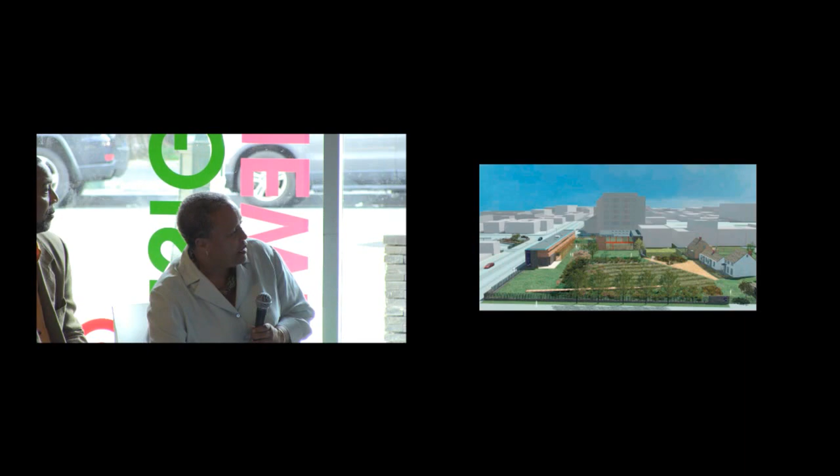And where we really began to look at water in a sort of different way was with the Weeksville Heritage Center, which was the second part of the restoration of the Hunterfly Roadhouses and providing a museum there. And what you can see in these presentation views is the idea of a landscape that puts the Hunterfly Roadhouses in context. The surrounding neighborhood is very urbanized.

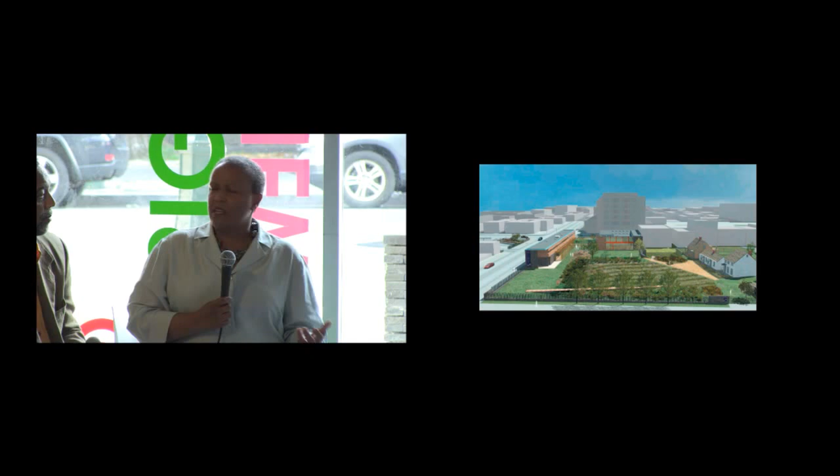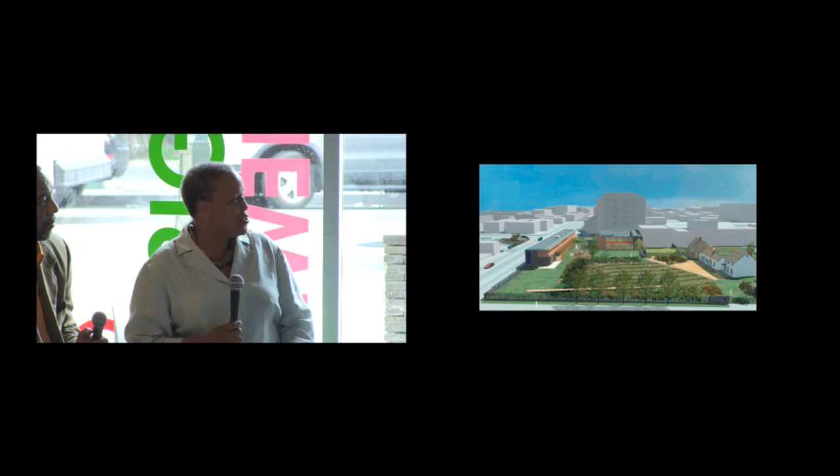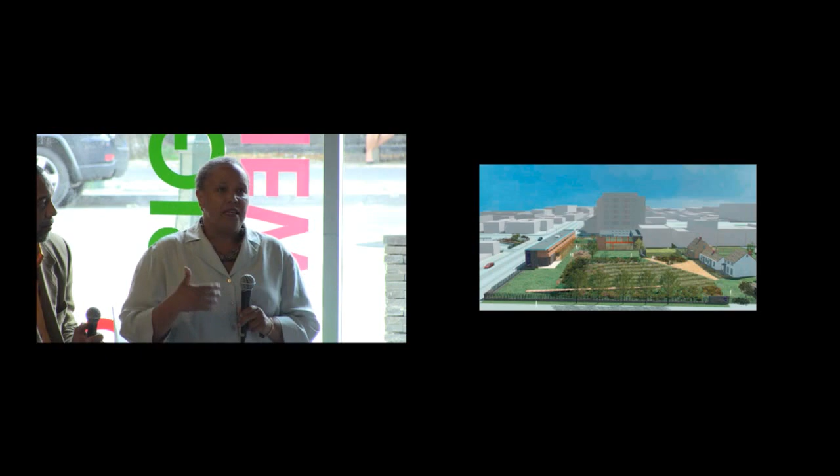It's not the Weeksville houses, I forget now. I'm drawing a blank. I shouldn't. There's public housing across the street, and I apologize for not remembering under pressure. But the neighborhood is rapidly changing. But the goal in this project was to, first of all, create an appropriate context and to continue the feeling of openness that persisted on that site.

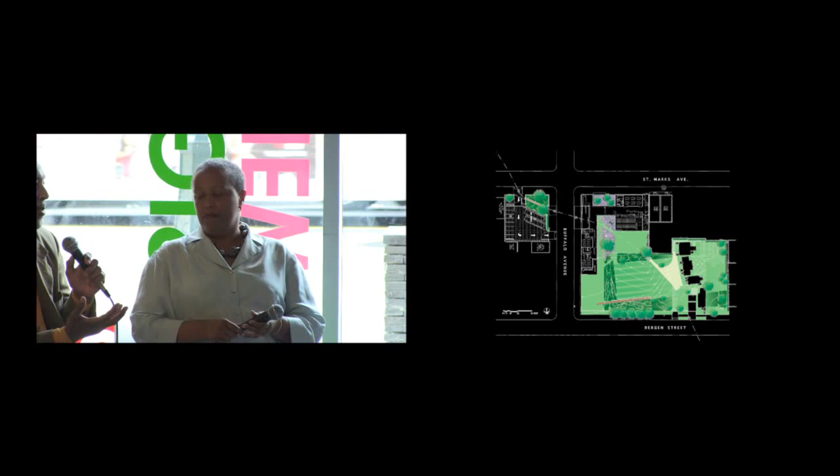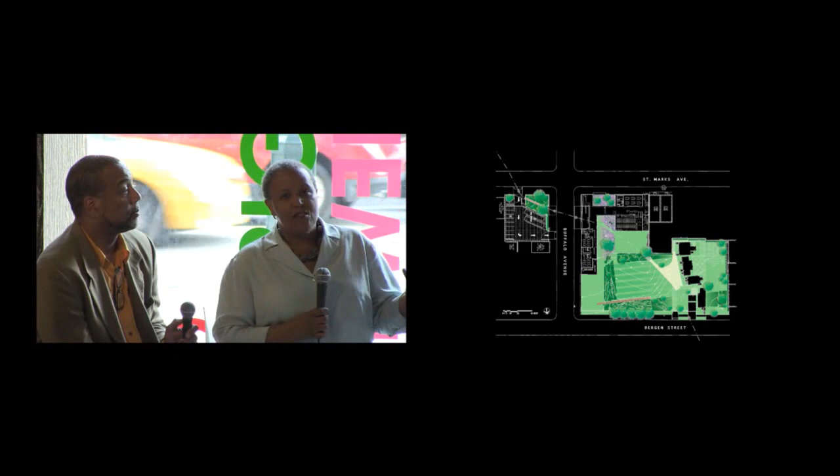And just a little bit about Weeksville. If you don't know about Weeksville, it is an early African-American community in Brooklyn, for which these few houses have survived in a context that very much has changed, as Elizabeth was saying. Very, very much so. And this is generally the presentation site plan that you can see here. And I will, if I can find the pointer, show you a couple of elements.

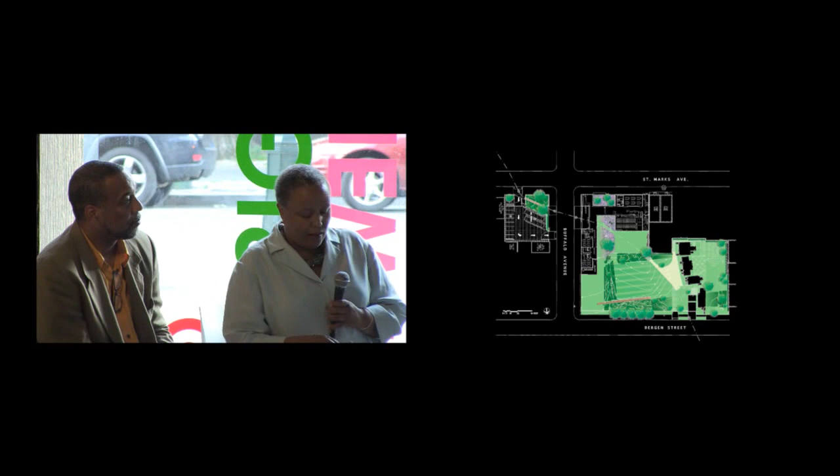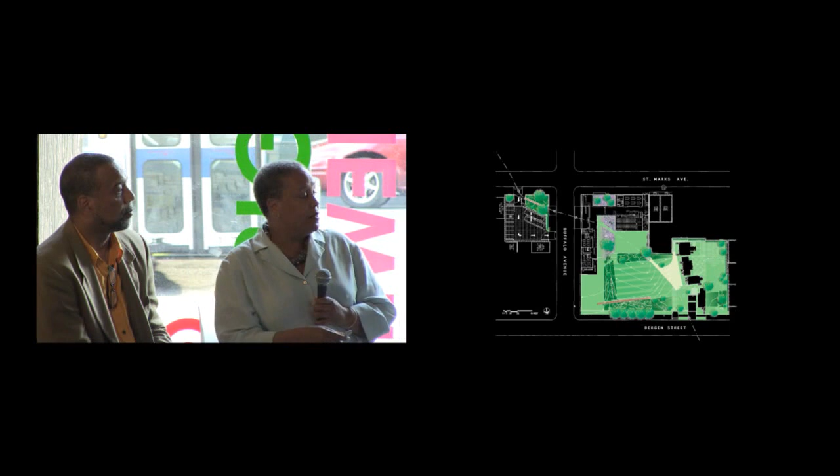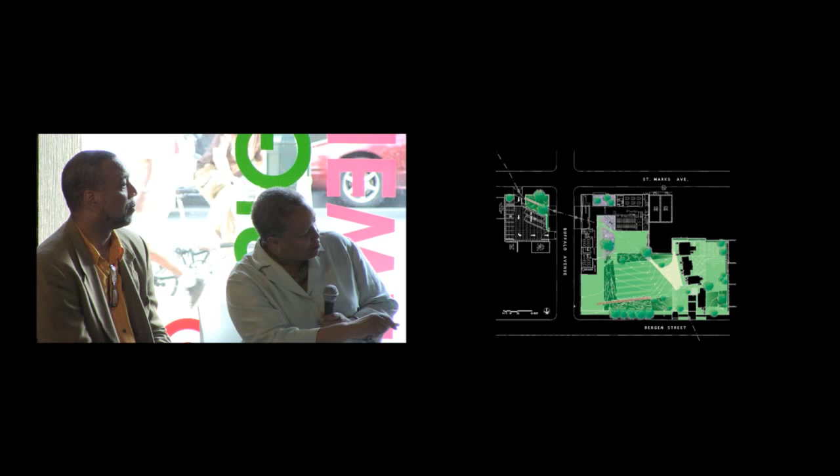And this dashed line that you see is a road that extended from Jamaica Bay all the way up through Brooklyn to what we know as Fulton Street, but used to be known as the Jamaica Turnpike. And this was the famous Hunterfly Road. And these structures were on the Hunterfly Road. And you can see that at one time, Brooklyn had a landowning grid, what's called a farm grid, that was skewed or not aligned with the grid that was superimposed after the Civil War.

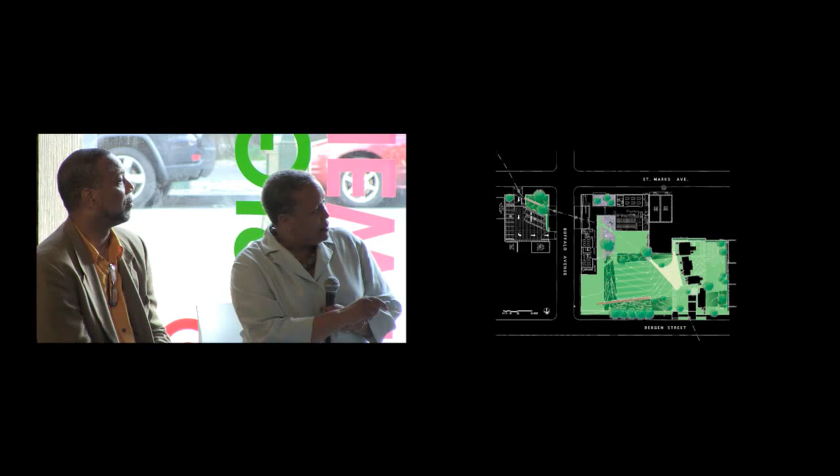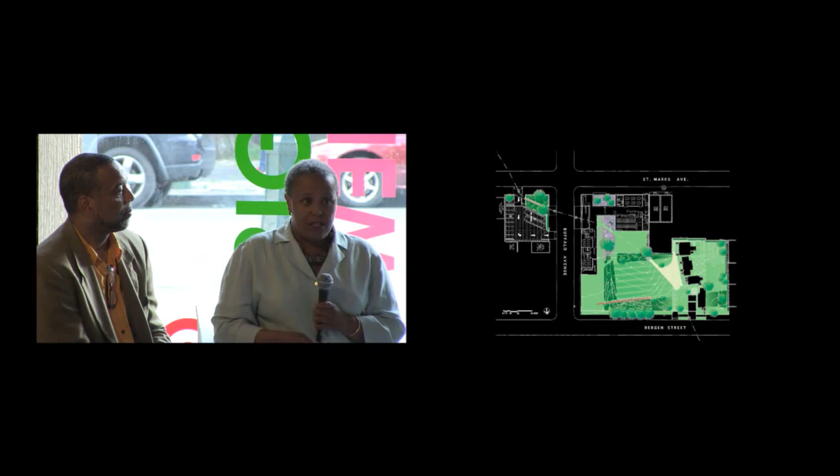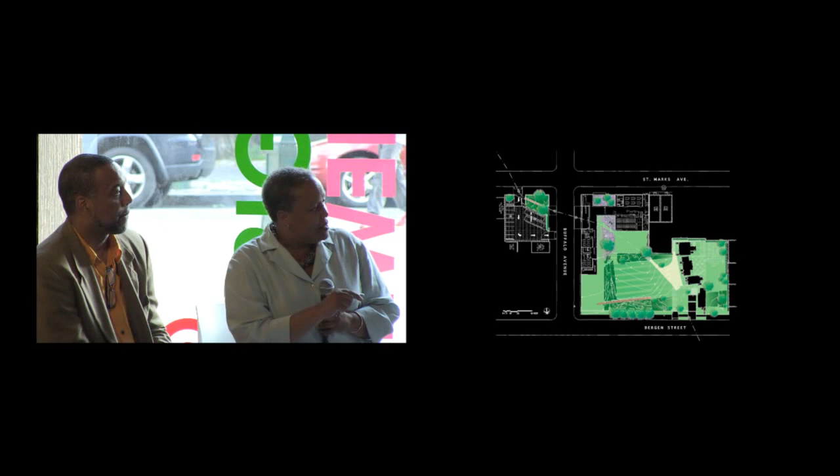And what happened is that when Brooklyn modernized, when it urbanized, its current grid just marched like Sherman across the landscape and obliterated many of these small communities that had been developed after slavery ended in New York State in 1827. Weeksville was one community that was named for James Weeks. Another such community was Carville. They were relatively close together. But you can see that through serendipity, really, these houses were preserved, and then this site has been regenerated around it.

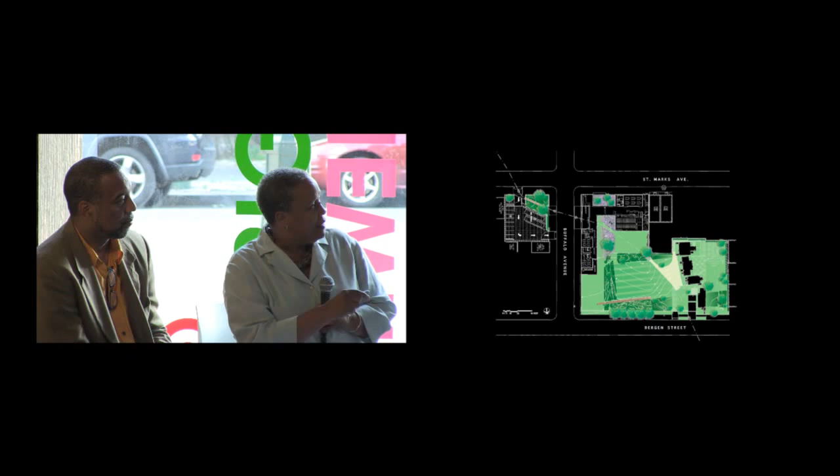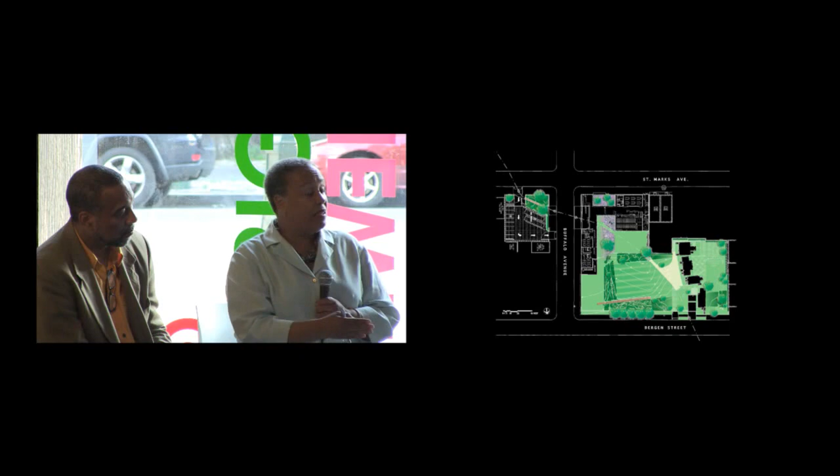Now, what we have here are 3 wetlands, and that was really the conceptual development and the driver, talking about how we used water on this site. The site drains this way. This is the high point, this is the low point. And in order to create these wetlands, we actually graded backwards in order to be able to create relief on the site, actually slow down the passage of water, create absorption areas.

And what we did was create the flat plains around the building, the large agricultural field. We created the swales, creating the wetland areas and the movement of water from this point back to this point. And we're able to make sure that we actually got water to move by creating 2 berms. And what happens is that when you leave the museum building and you walk across, you walk between a berm here and a berm here, and that's all that indicates that there's the Hunterfly Road until you get into what's the historic precinct.

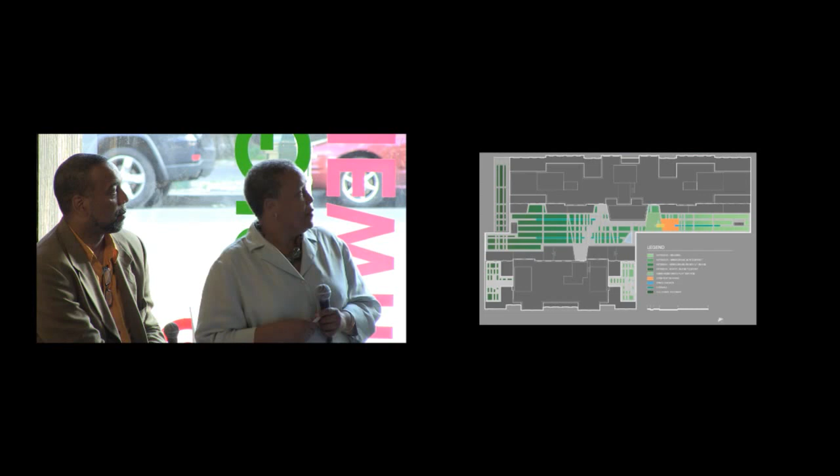Jack Travis will know that when we were working on the Kalahari, we did numerous studies for that center courtyard on the 2nd floor. This one was not built, but again, we're looking here at 50% coverage of the green roof, and if you want to know, that's what 50% looks like. And how we could introduce bands of vegetation, and for that matter, bands of water that would collect on an ephemeral basis in terms of the design.

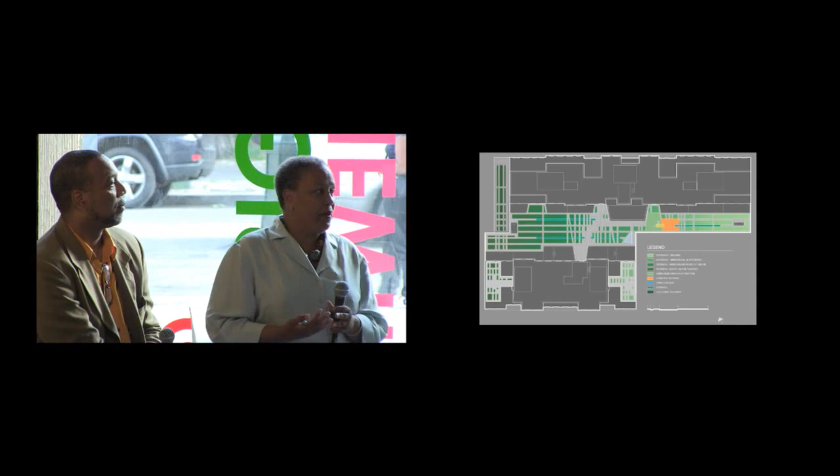Those of you who know, particularly in green roof residential construction, the roof itself tends to be pitched, but the paver level can be perfectly level because they're elevated. And so that allows you to hide a number of sins. And what we were trying to do was make sure that we could create, over these distances, adequate depth to get proper growth for vegetation in this manner. This was not the scheme that we went forward with. It was more of a conventional planting, but these were some of the studies that we did.

We also work with the Brooklyn Navy Yard, who is our landlord. And the Navy Yard is in a very rapid mode of expansion at the moment. There's a lot of change. If you've been there as long as I had, over 18 years, it's not the dump, as some people said it used to be. So with this has come a development of new landscaped areas, but there are also existing landscape areas that they want to grandfather into new thinking at the Navy Yard. The Navy Yard is very focused on sustainability and sustainable forward development. And we were looking at stormwater retention within some of the marginal areas.

That led the Navy Yard to say, okay, I believe we've been approached by the Brooklyn Grange. Is that whom I'm seeing in the back there? Is that Ben? Okay, can't see that far.

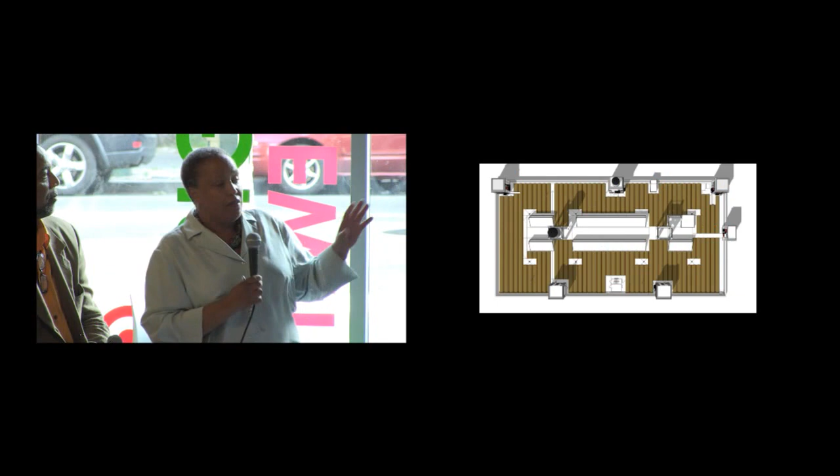And we were obliged to capture 100% of the water. So this meant having to do watershed studies and other things to make sure that we were able to discharge water that fell on the white roof to areas that are shaded in blue. Okay. This was one of the models that was generated to see what a farm would look like on the roof. Again, that's reflecting the 60% coverage. It's just another view of the same model.

And just for a show of hands, how many people are familiar with typical green roof construction? Ooh, small group. Okay. I'm here to demystify this. This is not rocket science. The systems are actually very, very simple. I believe somebody probably in Germany just realized that you can take waterproofing products, stuff you usually put on the side of a building foundation, and if you lay it flat, you'll have the same properties of protection and retention, and you can put a mix of porous aggregate and compost on top of it, and voila, there it is. That's only a very slight simplification.

What we have here, and I'm going to start from the bottom. This is whatever your roof is made of; here it's called structural support. This is your waterproofing membrane in this system. This is your insulation; I believe this is what they call an IRMA roof. There are other roof systems where the insulation is below the waterproofing. This is a drainage layer. If anybody has put drainage boards on the side of buildings, it's almost the same thing horizontally. So we sometimes call this the egg crate, because in certain applications it actually looks like the cardboard thing that you bring eggs home in, only larger.

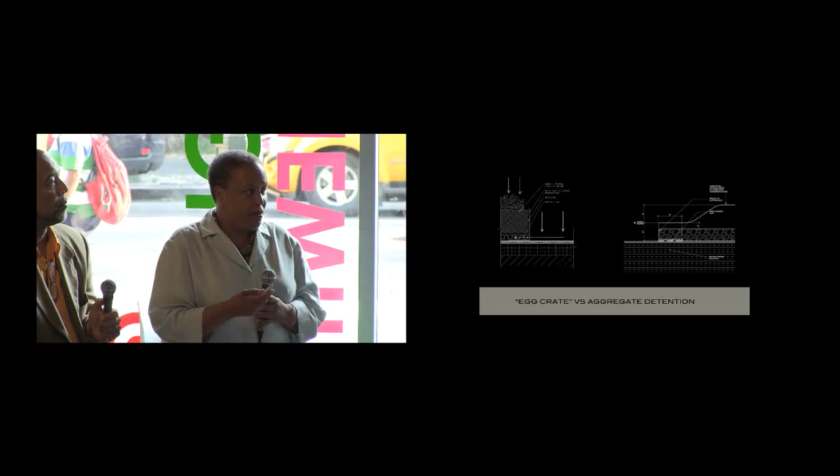drain. But we had a problem where we could not let that happen because the condition of the grant was 100% retention. So what we came up with instead, based on a throwaway comment made by the contractor at Morgan, is that below the growing layer, if we replaced this with another layer of expanded shale aggregate that was not bolstered with nutrient materials, this also has water retention capabilities. So we were able to filter in water and retain water within this medium while not sacrificing the ability to drain if we exceeded that 1 inch.

So it's like a sponge almost. It is, except that it's hard, right? Yeah. So it would be almost like absorbing water in very dense coral that could hold water because of its porosity. And what we figured out was that the depth of this layer was calculated on the basis of everything that fell in that 40%. Everything that fell on the white roof was calculated as retained in here. Because we knew that, particularly since we had organic material in the growing layer, we could handle 100% of the first inch of whatever fell on this. So we had a 2-layer system.

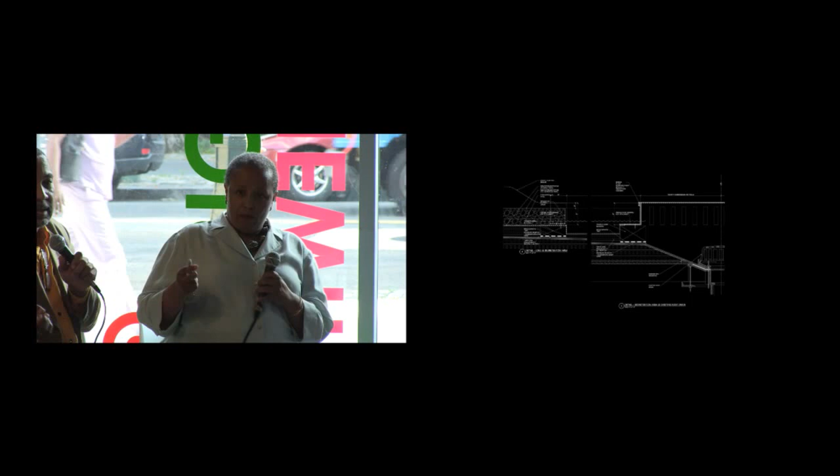Now, it happens that Building 3 has a loading capacity of 160 pounds per square foot. That means I could jump up and down on that roof, right? A lot of roofs are only designed for snow loads, which are 40 pounds per square foot. So that limits the inventory of roofs that could be developed for farming according to this particular model. So it's not feasible for roofs to be... Well, that's a development cost.

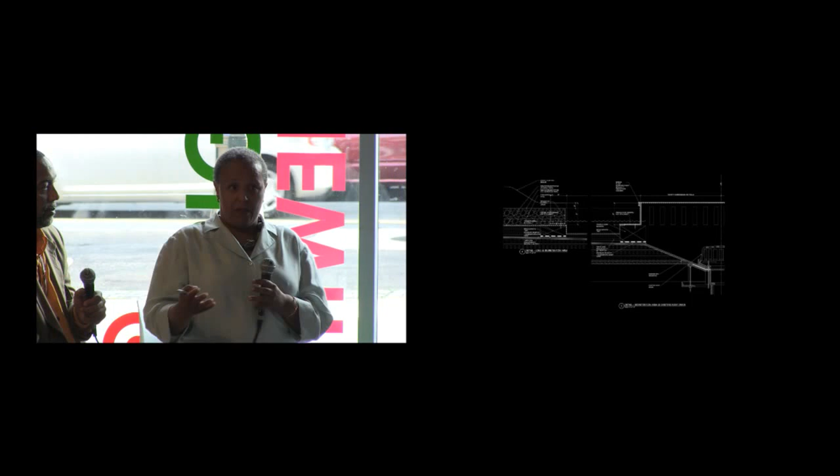What's happened here is that generally, if you have new construction and you're starting from scratch and you have a developer that's willing to put a heavy roof on a building, then yeah, you could get a 200-pound roof and knock yourself out. The Navy Yard has a lot of industrial buildings, a lot of flat roofs, but not every flat roof in the Navy Yard has capacity for a roof farm, as it turns out. Other developers of green roofs have done different things, but dunnage, which is the way you distribute loads across spans, is expensive.

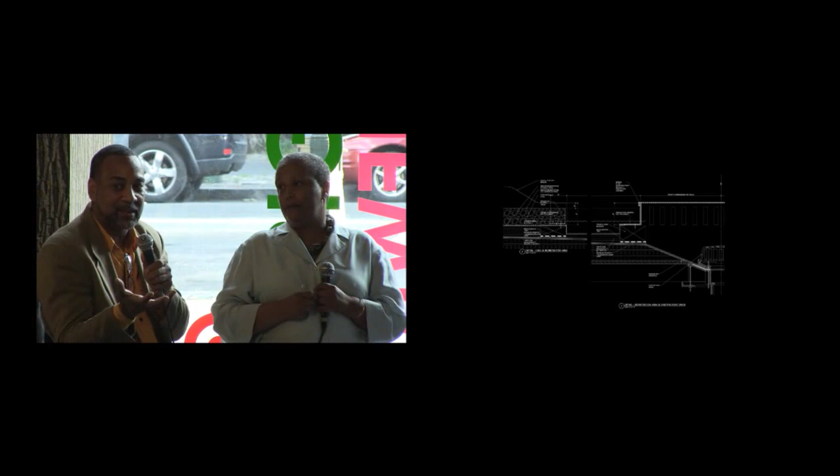And in New York, if you think of Harlem, the wood frame buildings with a brick party wall and wood framing, the likelihood of them being able to carry really heavy loads of soil and planting could be more limited than more contemporary construction, which is probably steel construction or concrete deck, which could take more of a load.

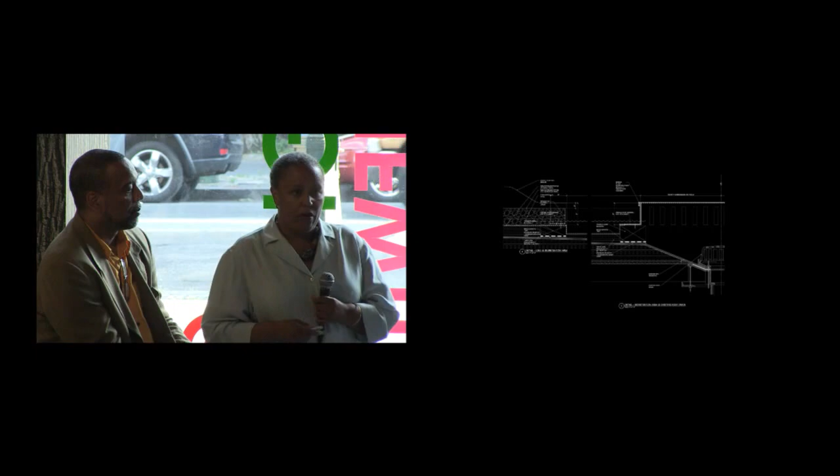Once we figured that we had built a better mousetrap in that sense, that we had been able to retain water that was running beneath the system towards the drain, we then addressed our second concern, which was that the growing medium that is generally sold is absolutely nutrient poor. And I'm going to say this about 80 million times for the rest of the presentation. It's absolutely nutrient poor. So if you're going to farm, the one thing you want is rich soil, right?

And one of the things that happens in doing green roof specifications and green roofs is that the issue of combustibility of materials does not go away. So you can't really put materials on the roof that aren't fire rated. And one of the findings was that the growing medium can't have more than 15% organic content because of this issue of combustibility.

So the developer, the actual farm operator, which was the Brooklyn Grange, in the course of the discussion said, well, we're going to have to really amend this in order for us to get this farm going and so forth and so on. And I said, you know what? It would just be my luck to be involved in a project where we were contributing to the same level of eutrophication that happens on a farm outside of Ithaca, New York.

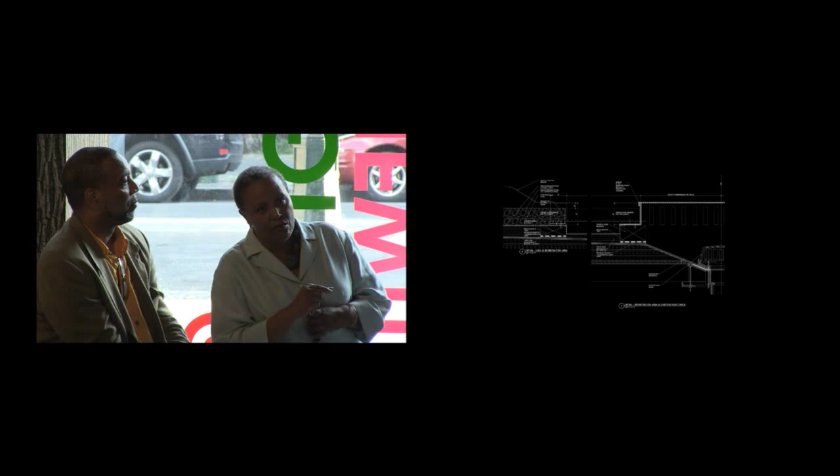So what we aimed to do was create a zone between the drain and, actually we calculated, but let's say an artificially determined edge, where any sort of fertilizer or excess nutrient that was dissolved or waterborne in here that made its way through here, which is all highly unlikely, could then be, the load of it could be dropped in a sump that collected an inch or two of water before it actually decanted into the drain.

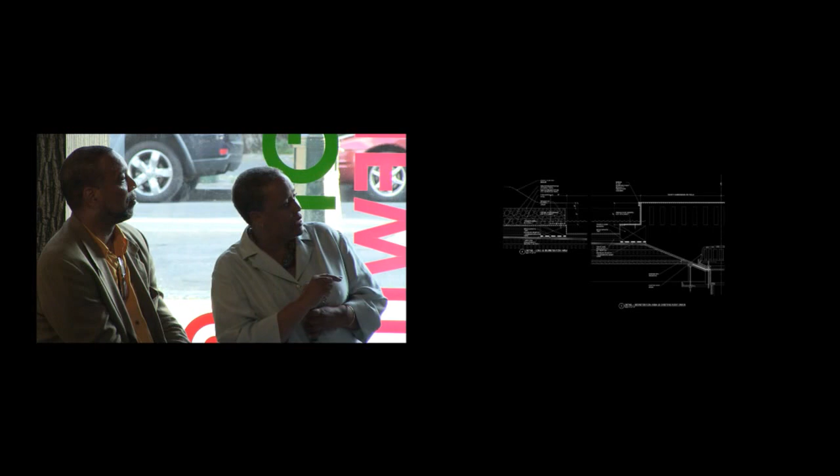So we created two zones within the green roof area, and this area, which is quite extensive, and I'll show you the following slide, is an area where we started to change the pitch or the slope in this zone here. And again, create the sump within this area, so anything flowing along here that made it into this area would then sit for a while before the water decanted into the drain. This is an area that we felt could be planted with crops that were more wet tolerant, that could actually withstand standing water, and actually probably needed the nutrient boost of the material that was collected there.

Now, this raised an issue that comes up in this type of roof development, because one of the issues in retaining water on a roof is that you don't want to quickly drain water to the system. You want to slowly drain water to the system. And so you're trying to create flat areas. And this is a concern where the roofing industry hasn't quite caught up with, let's say, the conceptual needs of the project. And the contractor in this instance had a lot of innovative ideas that from a constructability standpoint were sound. They're based on his experience in doing this type of thing.